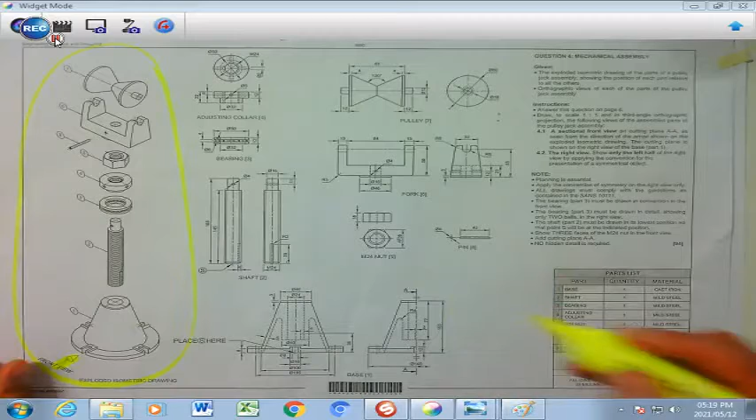Then we go on with the second bullet saying that the orthographic views of each part of the pulley jack assembly, and we are going to put the parts in various cubicles according to the part list. So you will have your base of cast iron, and that is going to be your base over here. That is both views of the base. And then we're going to go to the shaft, which is number 2,

and we're going to put that in a box over there. We have the bearing, which is number 3, which is going to be that part over there, and then the adjusting collar of mild steel, which is going to be the 4th component. And then number 5 is the M24 nut, made of mild steel as well. So there we have our nut. 6 is going to be the fork. This is going to be the fork here, right there, in that space over there.

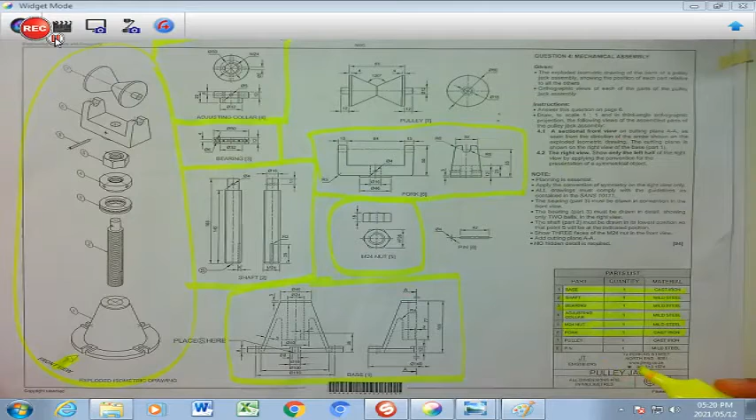And then the pulley is going to be number 7. That is the pulley that you will find over there, both views of the pulley. And finally, we will have the pin as our last and 8th component.

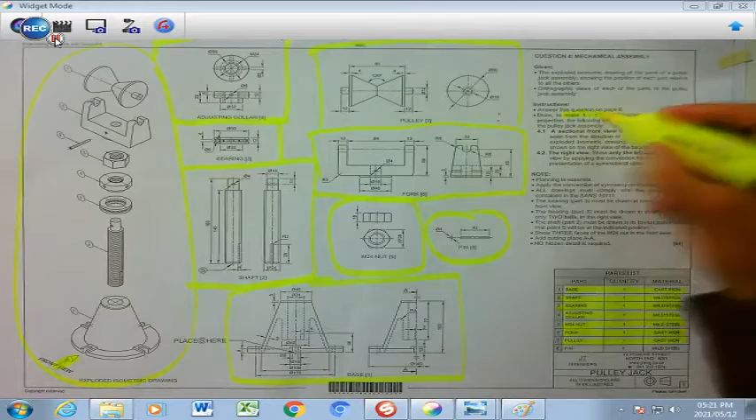You are requested to answer this question on page 6, which is your blank sheet of paper, and attached to that would be the assessment criteria in terms of all the components. You need to draw to scale 1:1, so that is going to be the full size as it is, in third angle orthographic projection, the following views of the assembled parts of the pulley jack assembly.

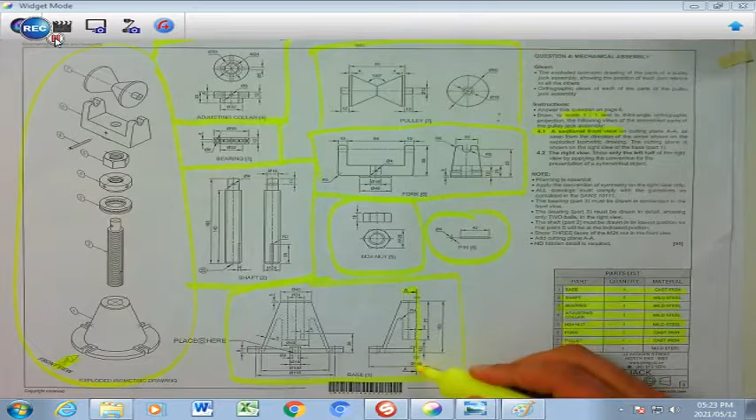You need to draw a sectional front view on cutting plane AA. So the cutting plane runs right through here, and you must draw it as it's seen from the direction of the arrow shown in the exploded isometric drawing. The cutting plane is shown on the right side, or the right view of the base part 1. So here you can see that is part 1. There is the cutting line as it is. That will show this as a sectional front view.

Then you must draw a right view as well, and you need to only show the left half of the right view by applying the convention for the presentation of a symmetrical object. So here you can see that you're only going to draw all the components on the left side of the right view. Okay.

Please note the following, that planning is very important. It's essential. You must apply the convention of symmetry on the right view only. All drawings must comply with the guidelines as contained in the SANS 10111. The bearing, which is part 3, must be drawn in convention in the front view, meaning that it will be a box with a cross. The bearing part 3 must be drawn in detail, and that shows with the balls, showing only 2 balls in the right view.

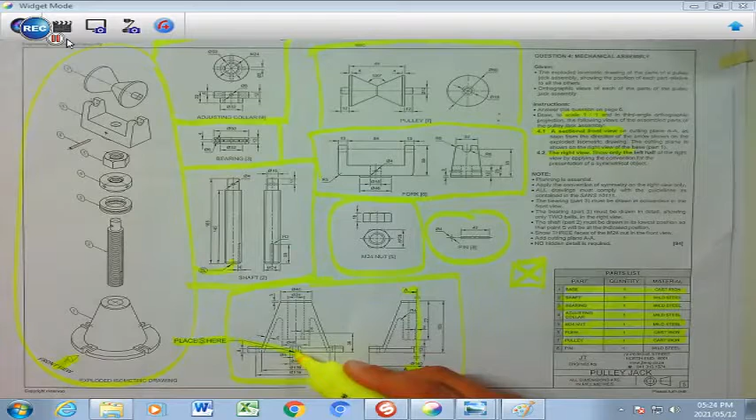The shaft part 2 must be drawn in its lowest position, so that point S will be at the indicated position. So this is very important to note, that that shaft S must coincide with the S part in your base. Show 3 faces of the M24 nut in the front view, and add the cutting plane AA as well in your right view. No hidden detail is required.

Learners, keep in mind that when you are going to view this from your front side as indicated by the arrow, all those views that I've highlighted in pink, those will be the views that will be visible in your front view or your front section of your assembly. Similarly, when you are going to go to your right view, you're going to find that those views highlighted in blue will appear in your right view, which is going to be only the left half of the right view. And the symbol of symmetry must be applied to the view.

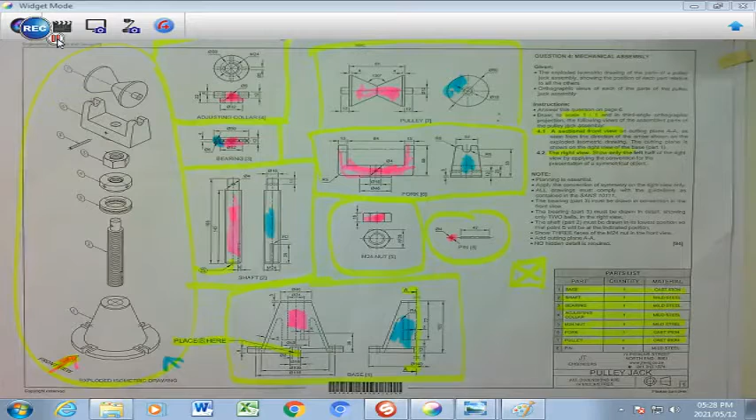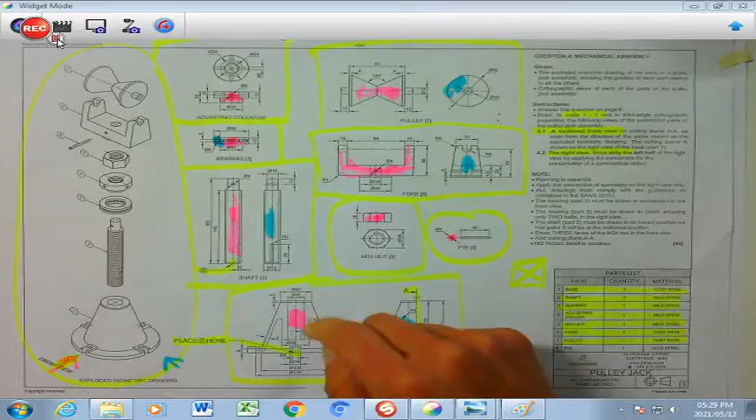Learners, I am going to take time to basically assemble all these components. Please take note how I start by building the assembly drawing from my base. Please make sure that you start with these two and keep them equally spaced according to your space planning. Learners, please take note that I will start with my base, both views of the base, and I will continue with the sectional front view. And as I progress throughout the drawing, I will build this component as it is indicated in my exploded view.